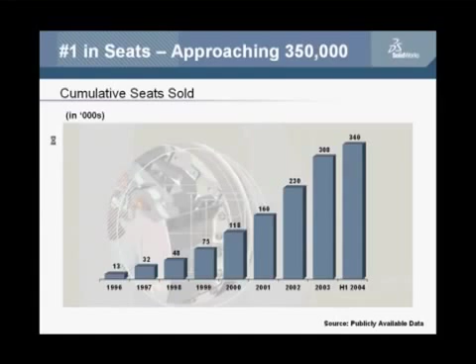So if a product is not successful, if it doesn't have this strong growth rate like SOLIDWORKS, chances are, if you need a bug fixed, or you're hoping it will stay up to date with the latest technology, they may not have the resources to do this. And very few products in the market really have those types of resources today.

In fact, very few. SOLIDWORKS is uniquely one of the only products that not only is growing extremely fast, but we're able to take that growth and put it back into making sure that SOLIDWORKS continues to innovate and make the product more efficient, faster, and better.

SOLIDWORKS offers the base product as well as Office and Office Professional, which really compose the standard capabilities of SOLIDWORKS.

In addition, for analysis, you can use COSMOSWorks, completely integrated into SOLIDWORKS. This will allow you to do assembly-based design and also some of the more advanced design scenarios, such as nonlinear analysis for maybe large displacements or plastic types of designs.

Partstream.net is really one of the big benefits of being a SOLIDWORKS user, because whether you're a customer who may have a need to put your parts on the web so other people can download them and use them in your designs, which helps in them purchasing your parts later on, or you're a SOLIDWORKS user who may just want to find standard components already built instead of creating them from scratch, Partstream.net, and also another product used by 350,000 SOLIDWORKS users, Content Central, allow this online standard component download, usage, and development.

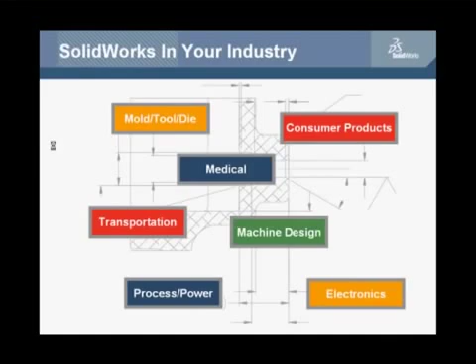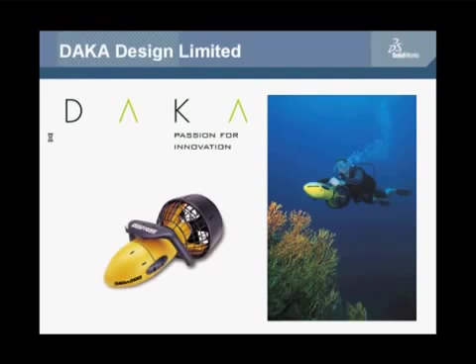What they really wanted to do is make something a little less expensive and a little more geared and appropriate for the consumer design market, the mass market. And what you see on the screen is the result of this redesign.

This redesign was called the Dolphin Sea Scooter. And the Sea Scooter in this case is a little lower powered and definitely manufactured for lower cost so that it's more affordable. Probably people use it for recreation, maybe in the swimming pool, and other more casual types of usage. And that's the difference. They were very successful with this.

So what we're going to do is show how Daka took an older design and made some modifications and came up with a brand new design that's been very successful today.